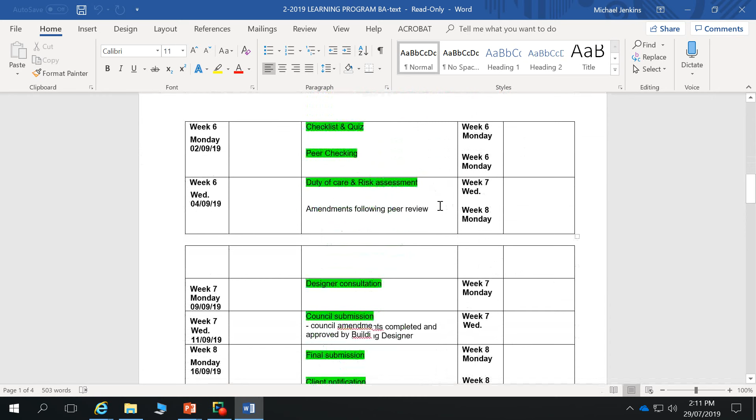And particularly the building approval, we'll be running it more like a workshop, working through lots of details of things, that's what we'll be doing. So split across exactly those same projects: residential project, multi-residential project, and commercial project.

With building approval, there's far less consultations. There's just the one consultation for every project. So you're not meeting with client, you're not meeting with council, just meeting with the building designer once. And that's basically just as a check, to check your details and go, is there anything missing? Is there anything that's been done incorrectly with that?

And I think one thing you'll find is with the planning approval, you end up doing some of the building rules consent stuff within the planning approval. The reason you do that is because, and you do this in practice as well, you don't want to go designing something, working through an idea, getting it through planning approval, and finding that you have to change it for building rules consent. So working through this thing, that's all fantastic, and then there's something in the NCC that says you can't do this, you have to change something, it goes back to council — you want to avoid that.

So you're thinking about building rules consent when you're doing planning approval to an extent anyway, with all the big stuff. With all the small stuff, like distance of power points away from hand basins, things like that, it doesn't really matter for planning approval — there's some stuff that doesn't matter. But you've got to have the right number of windows in there, for example, because that's something that's going to impact on the external of the building.

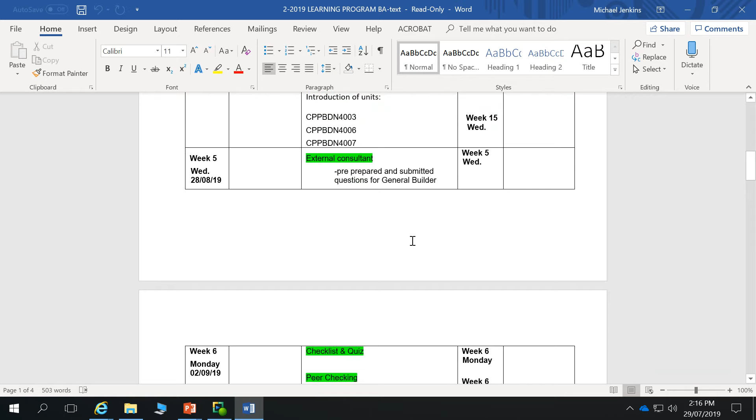And peer checking - so in planning approval you do peer checking, and in building approval you do peer checking. Both those stages you're checking for completely different stuff.

Look, you two may end up working together. We'll buddy people up, and that may change for different projects and things like that. We'll see who's at what stage, going at what speed, and pair you up. But you are going to be looking at each other's drawings, which you do have. I have to look over and see where you guys are at. I do try to avoid pairing up people where there's a great disparity between where they're at, because if I pair somebody up who's done no work and they've been quite slack, and I pair them with somebody who's fantastic, you know what's going to happen. They're just going, oh yeah, all that.

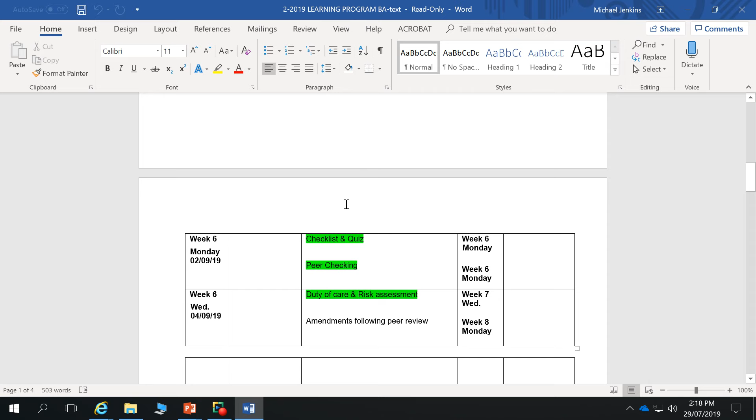That sharing, that working together, that's the way it works. That's the way it works in industry. Nobody reinvents the wheel - it's all sort of gathering bits and pieces, all bowerbirds, putting together all your stuff. That's how it happens, that's how it's going to happen in this class to an extent as well. But at the end of the day, you're going to have to be producing everything yourself. But you're going to be going, oh yeah, they did that thing, that's a really good way of showing that, or they included this thing - that's great.

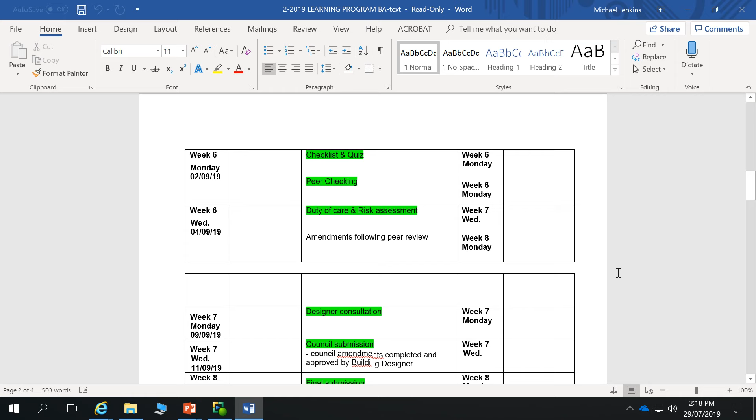And so you've got that one consultation with me. That consultation is far less formal than what they were in the planning approval. In planning approval, you've got a whole series of things that you have to cover within that consultation - you've got 10 minutes, it's like, oh, you've got to ask this and this and this and this and this. And if you don't, then you've got to send an email to say, hey, I need clarification on these things. So you've got to be far more formulaic about doing your consults in the planning approval, because it's all about gathering that information.

This is more about the designer checking over your stuff and going, yes, you've done that adequately. No, you haven't done that adequately - this needs work, this doesn't need work. But that's going to happen through the classes anyhow. We'll be talking about wet area details and timber framing details and all this sort of stuff in here, working through all of that. And by the time we get to that, I hope there won't be too much left to be talking about. Anyhow, and then you do council submission.

Another thing in the building rules consent bit is that within this subject it says that you have to make changes. So you'll send them off to council, and they'll bounce back, and the council will say you've done this wrong or you haven't included this. I have to find something that you've done wrong, or add something. Sometimes, yes - is that so we can do the revision sheets? Yes, yeah, so you've got to go through that process. What I've done, and I'll do it again this semester, is there are a couple of things I won't tell you.

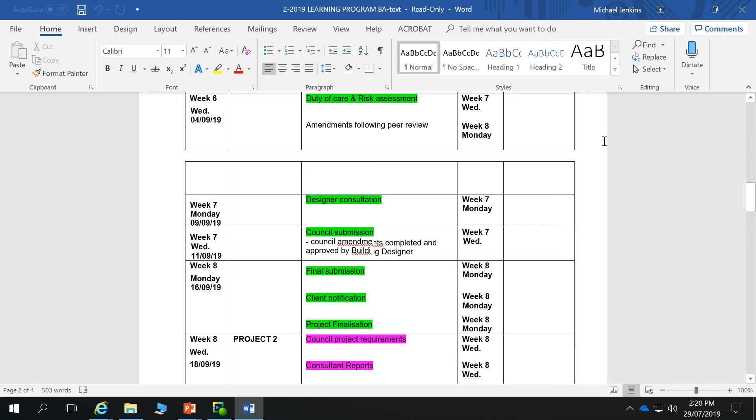That's the process it follows, and it's almost the same for all the projects. Your planning approval flows through a process with 12 steps. With this one you've got about 6 or 7 steps. Each project has exactly the same process, but different details.

So that's what we'll go into now. You've been through that planning approval - all of my students for the external of this have done planning approval previously. So I don't have any externals that have done planning and building approval, so I can keep these sessions relatively well condensed, I don't need to be recording much. So have a look at project 1.

Building approval - the procedure document's got to be your guide as to how you work through it.

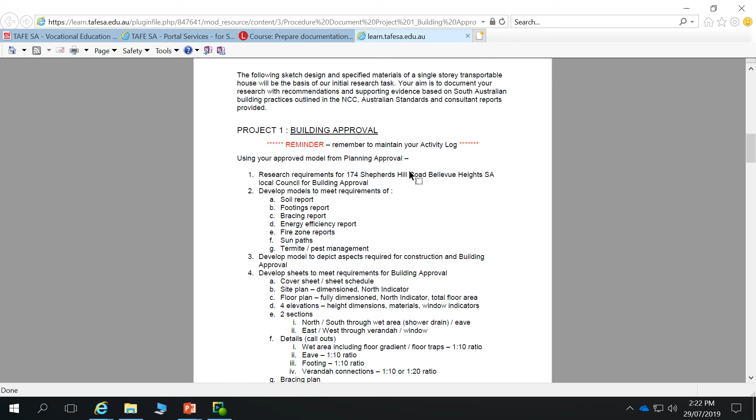Oh, could be a little bit larger. No, doesn't want to - just control and scroll wheel. Control scroll wheel. Oh yeah, cool.

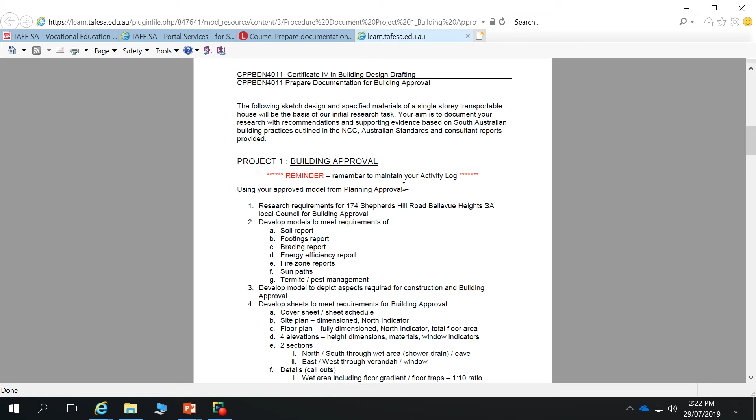Right, so as we discussed, planning approval - remember, maintain your activity log. Maintain your activity log.

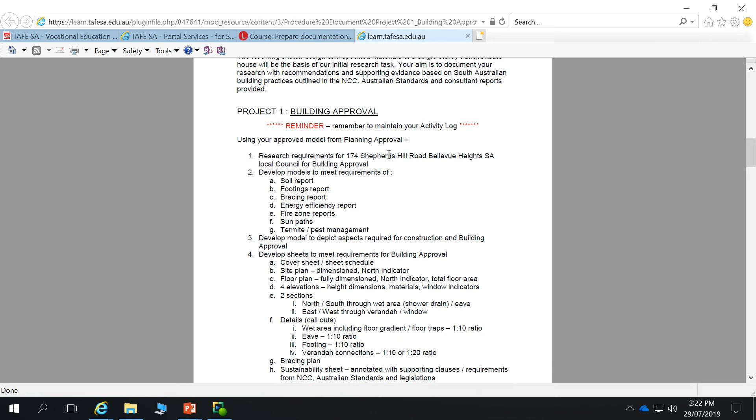So we've got that same project, number 174 Shepherds Hill Road, Bellevue Heights. Develop models to meet requirements of the soil report, footings report, bracing report, energy efficiency report, fire zone report, sun paths, and termite pest management - you've got to be looking at those.

You've got to be including all the details in your drawings. So you've got that footings report from the engineer that says this is what size beams at what location, and then you've got your little table saying like 2 N12s at whatever. You're going to have to draw a whole lot of sections and section details and actually interpret that information into drawn content - doing your cross section through your slab, drawing your bars at 12 millimeters at adequate spacings and adequate depths with correct concrete coverage.

Bracing report - there's a whole bunch of information given to you in regards to that bracing. Now it's not typically accepted that drafters should be designing bracing, but that's something I've done a lot of myself, and I can take you through that process to get a much better understanding of really what bracing is. So it's about you being fed that information by somebody and getting that into the drawings, but that's something I can share with you in more depth.

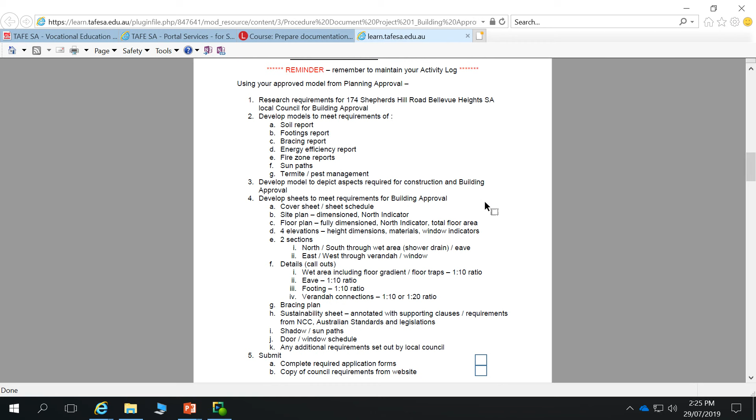Cover sheet schedule - so for you this is all very similar, and much of this is going to be recycled from the planning approval. You're doing both at the same time, reading both documents. What I've found best for students doing both is if they do their plans basically to building rules consent standard - you're meeting all the stuff that it says in the planning approval, but if you can be reading this at the same time, putting all your notes and everything on there, well then that's great. Do the whole thing - it'll be easier.

It's efficient, and that's what it's all about. So this is what you have to do in planning approval anyhow.

So there's site plan, floor plan, 4 elevations, 2 sections, north, south through wet areas, and then east, west through veranda and window. But because you're taking those sections through there, you then have to do details of sections, and that's where you use your detail lines. With the Revit model you're given, when you drop a section through there, it gives you basically nothing anyhow. You have to come up with all this stuff, so you draw all of these details in detail lines.

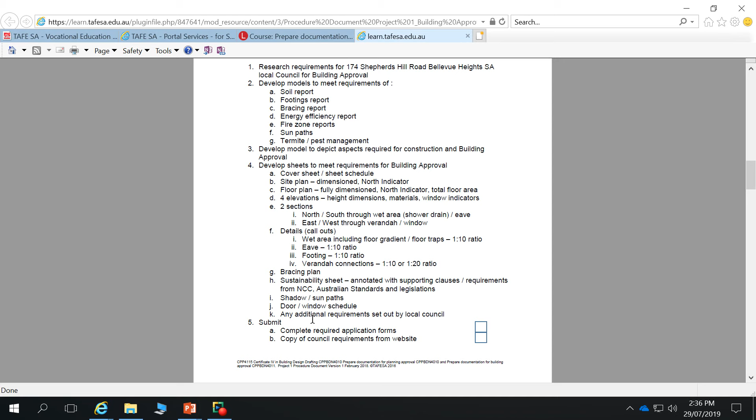Then there's the sustainability sheet, annotated with supporting clause requirements from NCC, Australian standards and legislations, shadow sun path, door window schedule, and any additional requirements set out by local council. That's going to be straight from planning approval - you've already done that stuff in planning approval, you'll be developing it further. It's the same thing. And then complete the required application forms, copy of council requirements from the website.

One thing I didn't mention this morning with planning approval - you already know this - is that this unit is written as a national thing, and they say that you have to fill out forms.

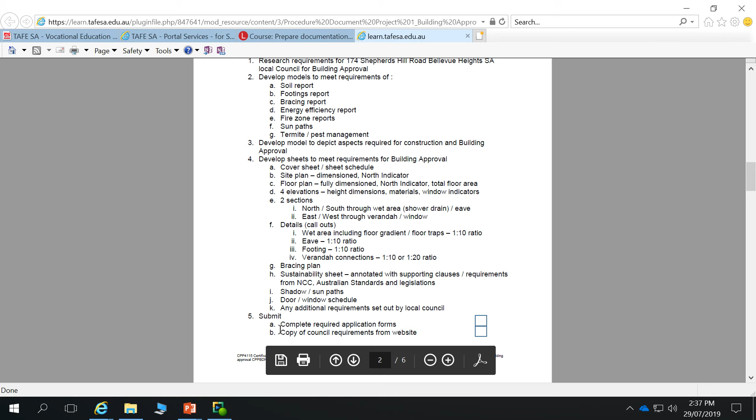Copy of council requirements from the website. So you're told to find various different things on the council website, some general construction information. I'm thinking that this should make fair sense to both of you.

So we've got footings, see footings plan attached. External walls, 90 by 45 MGP10 timber. Internal walls, 90 by 35s. Typically what's done now is you do 90 by 35s for your external walls, and 90 by 35s for internals, but your top and bottom plates might be 90 by 45s. Don't use that much 90 by 45 anymore, because the 35mm thick timber is so much cheaper than 45mm thick timber. So don't use this so much, specifically as a guide.

So there's no rebate on this slab. Ground level is 150 below finished floor level. If you draw a section through the slab, your ground level will be at 150 millimeters below the top of your slab, and your cladding will lap over that a little bit. You need at least 100 millimeters of clearance between natural ground level and the underside of your cladding to meet the termite requirements.

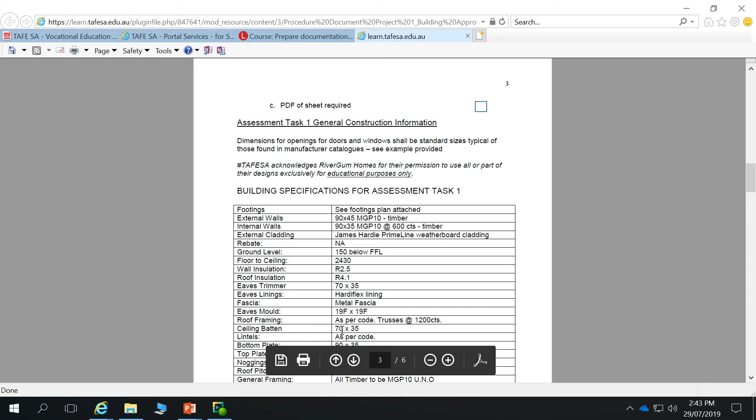So we've got a 19 by 19 eaves mould as well to carry that eaves sheeting. Ceiling battens - 70 by 35 ceiling battens - they'll be at 600 centres across on the underside of the bottom chords. You don't have to specify lintels, don't have to go through to the frame, don't do that, that's fine.

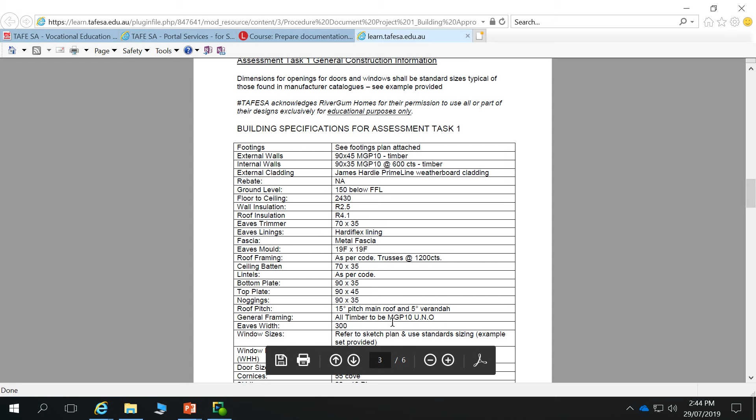Yeah, so here's your details there. I think all of this has got to make a fair bit of sense to you. But that's where you get a lot of your idea - if you're drawing a detail, you go, oh, what size is that? What size is that cornice? Go back to here, you go, oh yes, 55mm cove cornice.

Does everybody know what a cove cornice is? It's that semicircular cornice - on the inside at the top of the ceiling, between your ceiling and your wall, you have a little moulding.

So that's a cornice, and you've got all sorts of different types of cornices, but there'll be models on the Revit. If you've done Revit Intermediate, you would have already used them. There's one over there - it's basically a quarter of a circle. That's the most common one. So this is a cheap build, like a 55mm cornice is a cheap build.

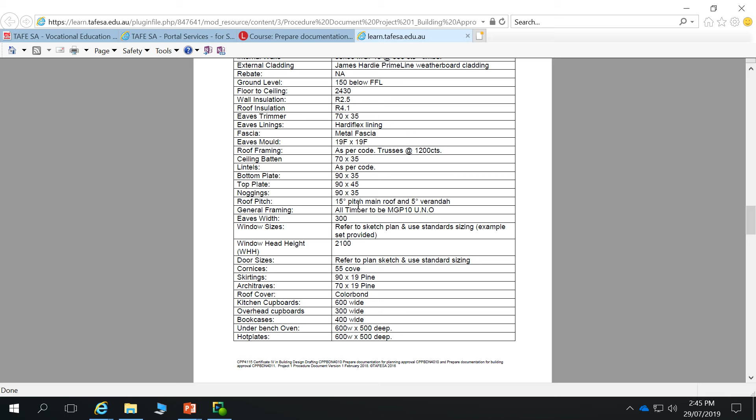So you're going to have to be doing those details, but then you're also going to have to think about other things you're asked to do. In a drawing sense, I'm not expecting you to go any further than that. There's a few things we could do, but I'm not expecting you to do anything more in terms of drawings - you have to do those sections, those details. You interpret all the information you've been given, gather some details, look at other details from other sources, work those out, and we discuss those. I'm not expecting any more drawing than that, but what you can do is develop your general notes.

So think about general notes for this residential building - things we'd be speaking about are: all timber framing as per AS 1684, and then a note about unless otherwise specified, nominal fixings as per table 19, timber frame code. So you want to say all the timber framing is as per that. Then you'll say trusses as per manufacturer's specifications at 1200 centres or so. So you have some notes.

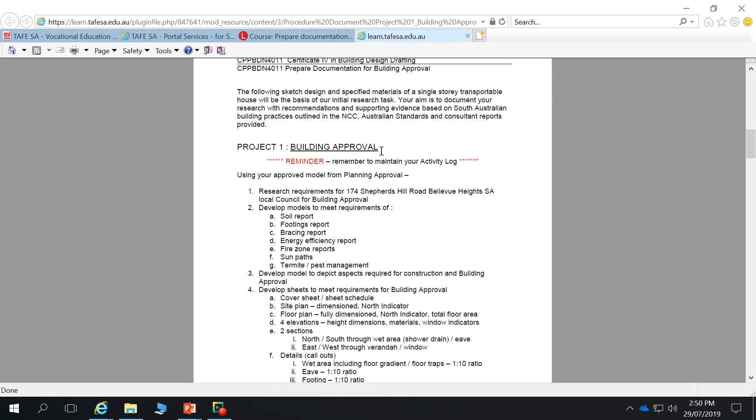That's pretty much it for building approval. So we've looked at project 1. Well, what we can do is go through and have a look at project 2 and project 3, but I won't really dwell on them because they're coming. We'll take it step by step. So project 1 building, project 2 building.

Procedure document for that. So, you've got to meet requirements of natural ventilation and natural lighting. You're across all that already, so that's going to be easy. You'll get that into planning approval and building approval at the same time. Materials - so you're thinking about durable materials that are fire resistant to a certain standard because we're building on a boundary, all that sort of stuff. Don't want to give too much away.

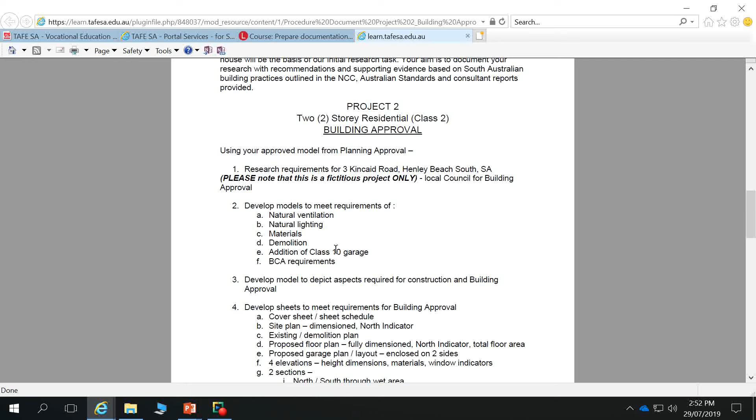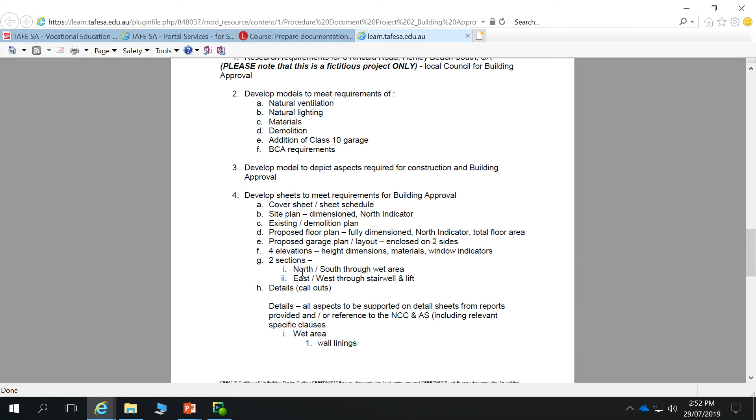Demolition, how you make notes around all your demolition, and possibly some general notes around demolition that relate back to Safe Work and Safe Code of Practice for all demolition work as well. So you might be making some mention of those, in class 10 garage, etc. So cover sheet, site planning, existing demolition plan - you've done that in planning approval - proposed floor plan, garage, 4 elevations, 2 sections through wet area and through stairwell and lift.

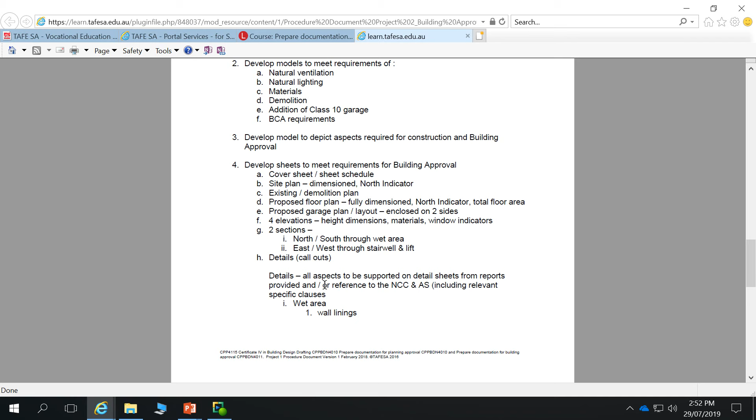So in project 2 you're doing a lift there. What's that? I'm just thinking about project 2. Yeah, so you'll be adding a bit more detail. Relevant specific clauses relating to wet areas, wall linings, wall and floor, water resistance, waterproofing requirements, type, and heights.

You don't - so in project 1, you've just got to be doing that cross section through the floor with your gradients and your waterproof membrane and your puddle flange and things like that, showing all that. We're not really going into walls and things. But what we did in the office where I worked is we had wet area details just as a standard thing. So it was 3 pages of wet area details for every project.

Boom, they go on there. Because if you're covering all bases with something that's prepared earlier, it just speeds it up enormously - redoing all this stuff takes a lot of time. If you're working through project 1 and you've got plenty of time, go through AS 3740, produce yourself a really good set of wet area details and notes that meets the requirements of project 2 as well. You go, okay, there we go.

So we're looking at wall linings, and then wall and floor water resistance, waterproofing requirements, type, and heights, screed, gradient, and floor set down.

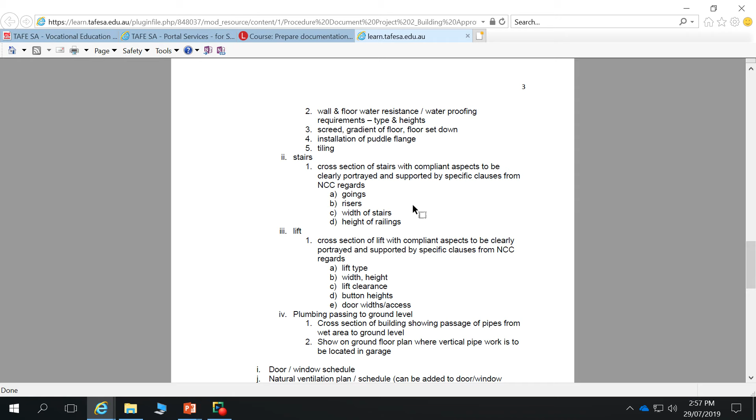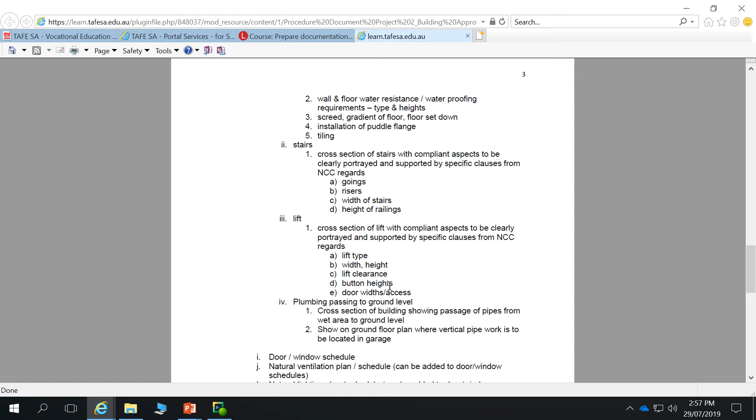Cross-section of lift with compliant aspects to be clearly portrayed and supported by specific clauses from the NCC, regards lift type, width, height, lift clearance, button heights, door widths, and access. So as you know, much of that is given to you in that section, and you just got to fill in the gaps and put in the notes.

One thing you might want to ask a consultant about on attendance day. Attendance day will probably be in week 5 or week 6.

So we've really covered project 1 by then. So a lot of those details, the bracing, the eaves details, veranda detail, all that sort of stuff, we'll be working through. But hopefully I'll have a plumber lined up for that attendance day.

And you can ask them about doing plumbing stacks, how we should be doing plumbing runs, and how we should be looking at all these things, where we should have inspection points, where we need to have overflow relief gullies, all these sort of things.

We'll get into that further, but probably around plumbing is where you can ask stacks of good questions, because that's something that, as drafters and as the course says, you should know about services and be able to include services, but none of us can go out and do plumbing work.

Well, we can do roof plumbing to an extent. You don't need certification for doing roof plumbing and stormwater, and there's some other plumbing stuff you can do without certification. But everything mains connected, everything that's waste involved with plumbing, we need to be registered plumbers for doing that work.

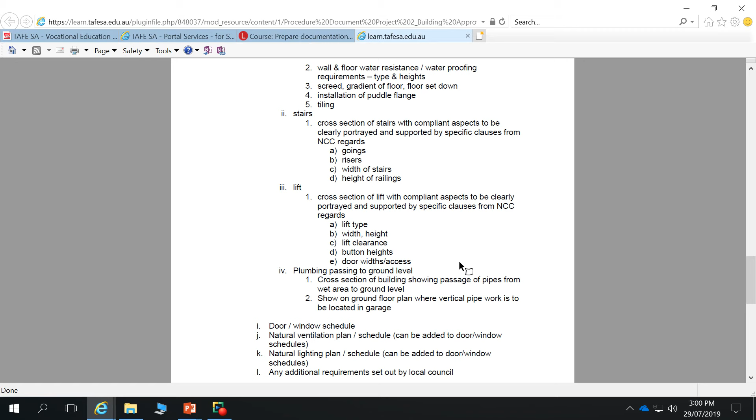Door and window schedule, natural ventilation plan - these can be added to door and window schedules. So you've got your door and window schedule saying this is the size, and then just have a little column saying this is the percentage of the floor area. Once you do that, it's really easy for the private certifier to say yes, lighting meets 10% and ventilation meets 5% of that floor area. Easy.

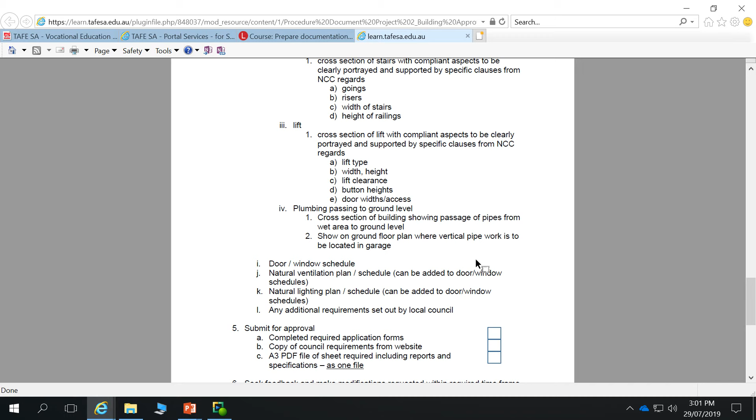Beyond that, it's all fairly simple - fill application forms, things like that. Seek feedback and make modifications requested within the required time frame. So I'm going to tell you, you need to make these changes, that's all fine. And notify the client when approval is achieved, submit the full set of required plans and supporting documentation. That's all fairly standard.

So definitely we'll start. Basically the main takeaway message for you is you do all the planning stuff, work on your building rules consent concurrently while you're doing it. Work through all three things like that, and I'll help you out with some of those.

Okay, so for you, focus on the planning approval stuff for now, and then beyond that - in terms of our process, because planning approvals is pretty lecture heavy right at the start, and we're focusing on your sources of information etc, we really can't get much into the building approval stuff. No, I want to be running you guys at the same speed, so I think...